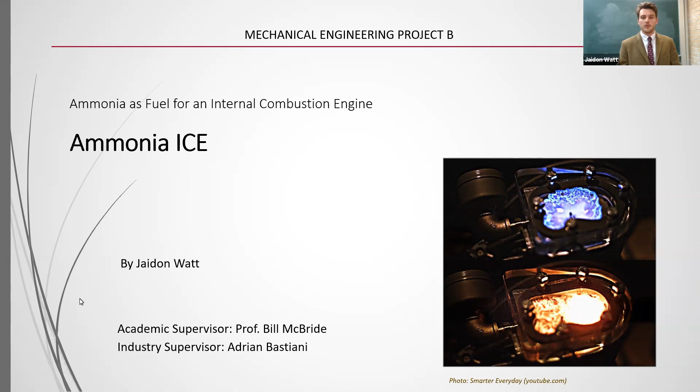Hi, my name is Jaidon Watt, and I would like to present my final year project in the study of ammonia as fuel for an internal combustion engine.

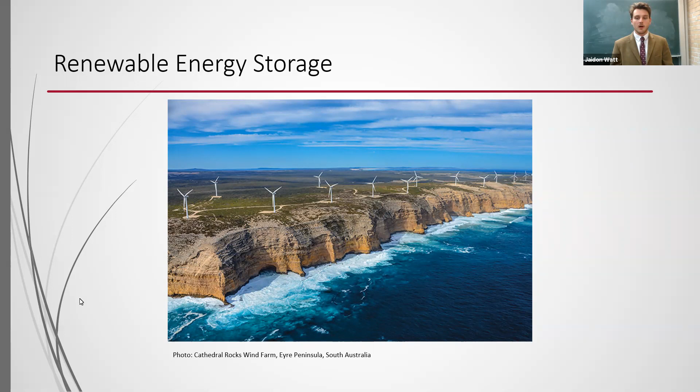So what's the alternative? Well, another form of chemical energy storage: fuel. A carbon-free fuel, that is. If the energy used to synthesize the fuel comes from renewable sources, the entire cycle can be made completely carbon-free. More specifically, using wind or solar to power a plant to make 1 part nitrogen from air and 3 parts hydrogen from water in the Haber-Bosch process to make ammonia.

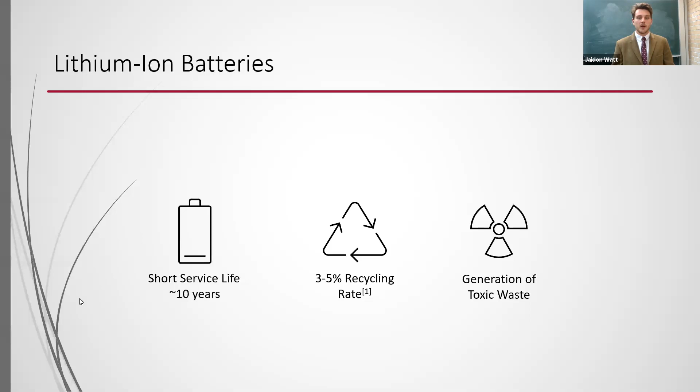A smelly, toxic gas, ammonia doesn't exactly scream clean energy future. But although it might not make you feel warm and fuzzy yet, allow me to point out why ammonia is starting to gain global interest.

First of all, as mentioned, it's carbon-free. The ammonia generation would store the clean energy and then later be able to fuel gas turbines, fuel cells, or reciprocating engines without direct CO2 emissions, in a process such as the one shown here.

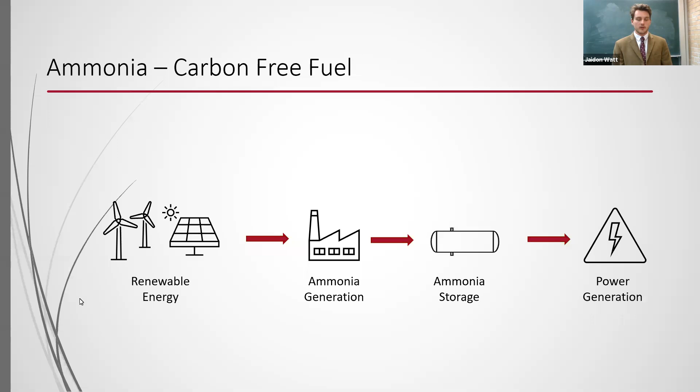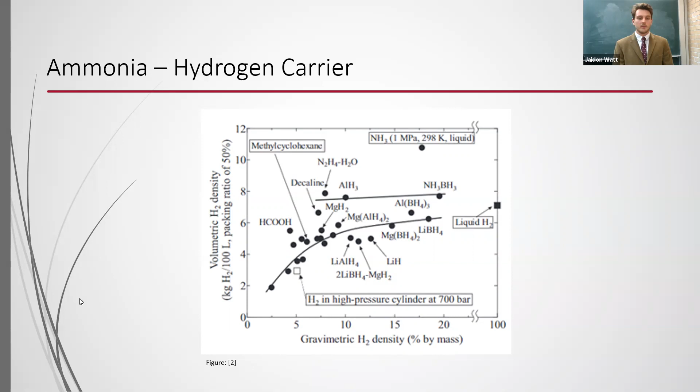Additionally, ammonia is a hydrogen energy carrier. It is more volumetrically hydrogen dense than liquid hydrogen, but much easier and safer to store and transport, being liquid at room temperature and relatively low pressure, with well-established infrastructure already in place. Which is why the CSIRO have developed a method to crack the transported ammonia into hydrogen for use, instead of storing hydrogen itself. David Harris from the CSIRO points out that ammonia is the key enabler for exporting renewables.

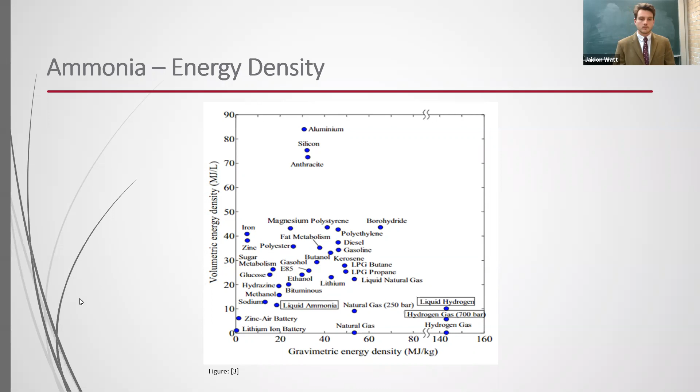The carbon-free and energy-dense nature of ammonia is the foundation of this project, whereby we are investigating the use of ammonia in an internal combustion engine for small-scale power generation, in the hope of providing off-the-grid power for rural homes. Although fuel cells may present the most efficient solution to using ammonia fuel, they are still expensive and would not be an affordable option for homeowners at this time.

In this final year project, the overall objective is to compare and optimize performance characteristics of a spark ignition engine using ammonia as fuel compared to conventional fuels, including all design and safety considerations in implementing the ammonia system.

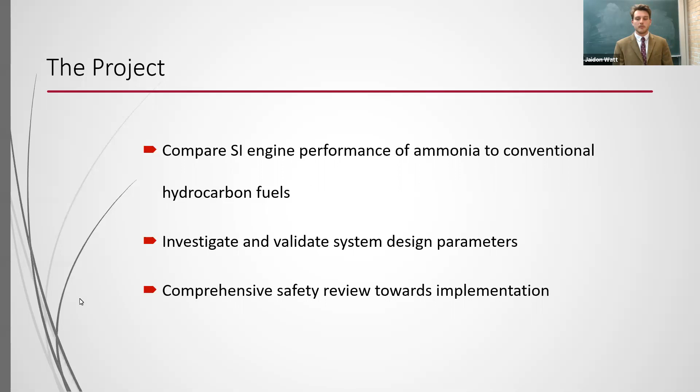In consideration of ammonia's limitations, I have a few listed here. So firstly, we have high auto ignition temperature, that's 2 to 3 times that of petrol or diesel. That is the temperature at which it auto combusts without a spark, which makes it difficult to use in a diesel engine, requiring impractical high compression ratios. This is, however, alleviated by its high flammability limits, allowing for more fuel to air in the combustion chamber.

We also have a high latent heat of vaporization - that is the energy required to phase change from a liquid to gas. We'll see that later, that's an important fact. And lastly, slow flame speed - it is 1/5 that of petrol. That is the velocity of the flame in the combustion chamber, which can result in engine knock or misfire.

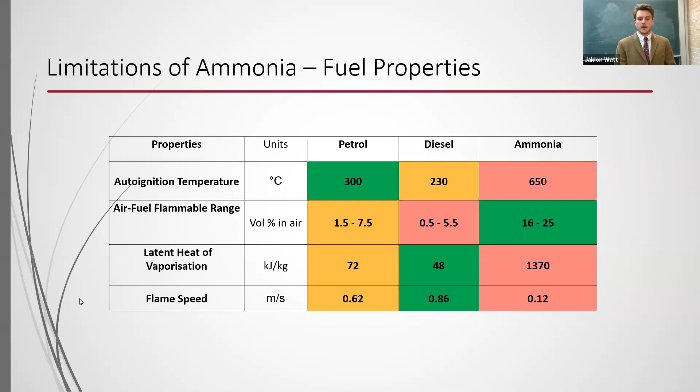Misfire is a risk of releasing unburned ammonia known as ammonia slip, which is hazardous to human health at fairly low concentrations. Finally, imperfect ammonia combustion trades one problematic pollutant, carbon, for another, nitrogen.

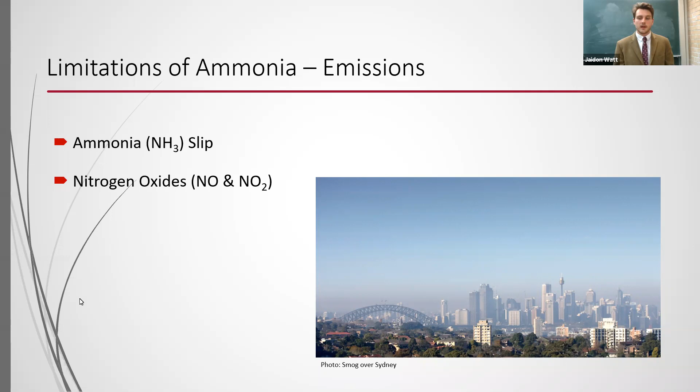Nitrogen oxides, or NOx, are responsible for ozone depletion, smog, and acid rain. It is the reason you have a catalytic converter on your car, but similarly, there are processing techniques to mitigate NOx on an ammonia engine to acceptable emissions.

To alleviate these problems, a combustion promoter is usually required. The ideal promoter is hydrogen, given that it produces no carbon, has the highest reported thermal efficiency, and would not require any additional storage, as part of the ammonia could be cracked to account for 5 to 15% of the fuel mix. However, we did not have access to this technology or the ability to store and combust hydrogen safely.

Therefore, the project considered the use of a hydrocarbon promoter. Given we are using a spark ignition engine, we investigated the use of petrol as a combustion promoter. The optimal mixture suggested in the literature is roughly 70% ammonia to 30% petrol.

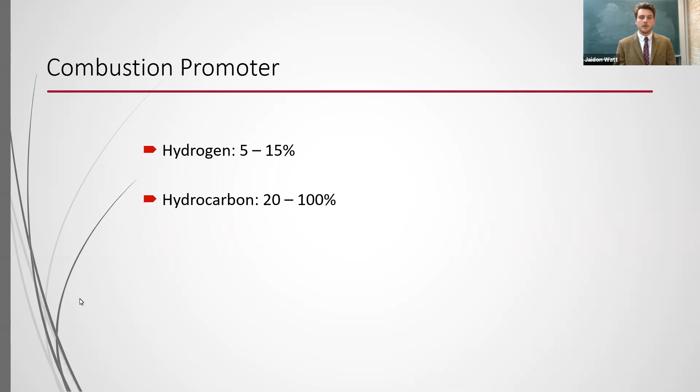The use of petrol is justified by a dramatic reduction in carbon emissions at low petrol mixtures, 75% reduction at around the optimal fuel mix. The linear relationship is shown here.

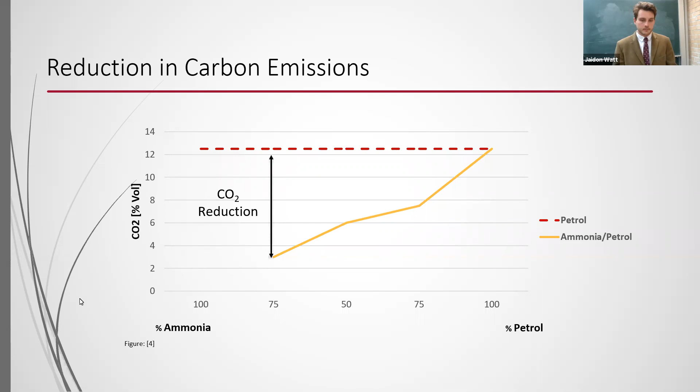The literature shows that use of ammonia also demonstrates a significant improvement in the engine's efficiency and performance than just petrol alone. This study, for example, achieved 32% brake thermal efficiency at 68% ammonia mix, dependent on performance characteristics such as compression ratio, equivalence ratio, timing, and inlet pressure and temperature.

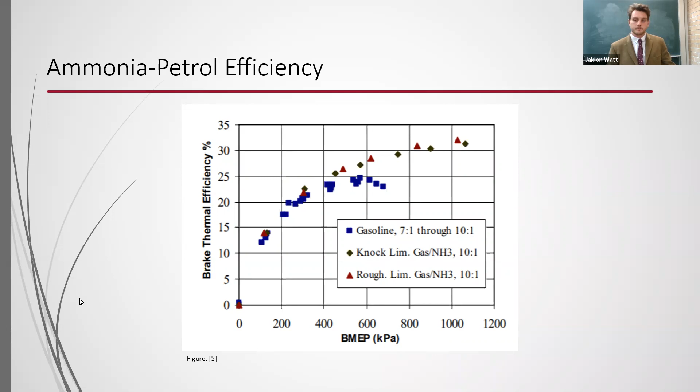The engine used for experimentation in our project is a 16 horsepower rated stationary engine, initially carbureted, coupled to one of the eddy current dynos in the EC building test cell.

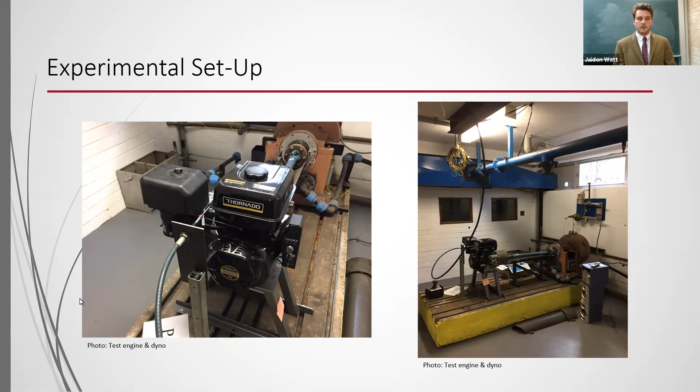After the design and fabrication of the exhaust incorporating a lambda oxygen sensor, we could perform baseline engine tests using petrol. The engine is controlled through the dyno controller and some installed software.

The transient response is controlled through the software, though this settling time was difficult to decrease beyond a certain point. This is the operating interface while performing testing, which I think is very cool.

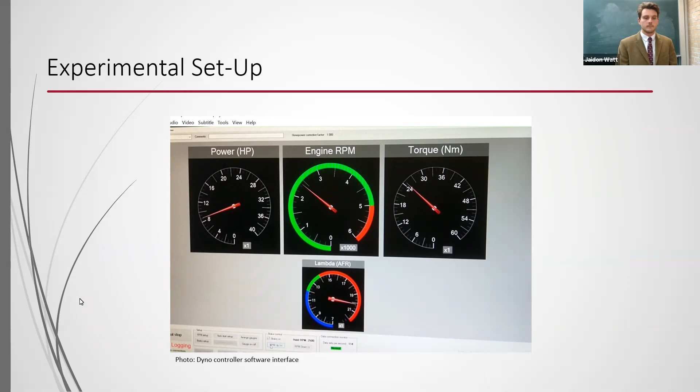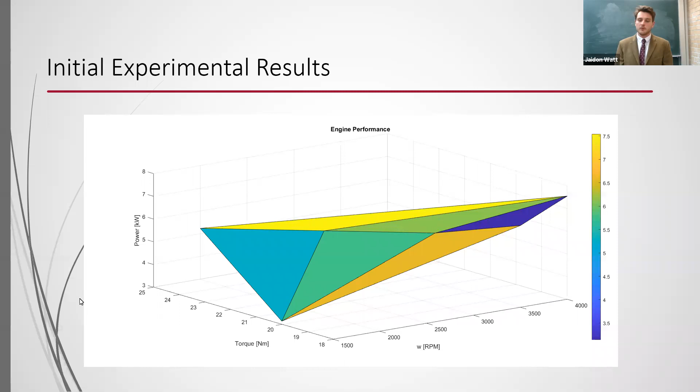The engine is designed to operate at a wide open throttle, that is around 3,600 RPM and beyond. As such, poor performance was observed in the low RPM range and even stalled below 1,500 RPM. The results also need to be repeated due to an error with the controller limiting speed beyond 3,500 RPM.

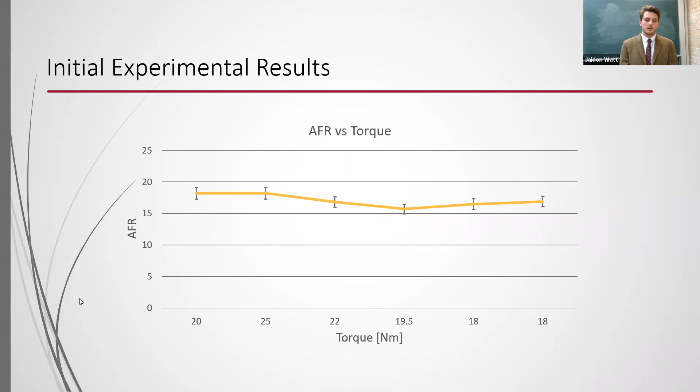Very high air-fuel ratios were also observed when the load of the dyno was applied, as you can see here. For context, the stoichiometric air-fuel ratio for petrol is 14.7, which is much lower than what we were achieving.

It will be interesting to observe ammonia exhaust gas temperature with lower air-fuel ratio, and if the temperature range will be suitable for selective catalytic reduction to control NOx. So this will be compared in future.

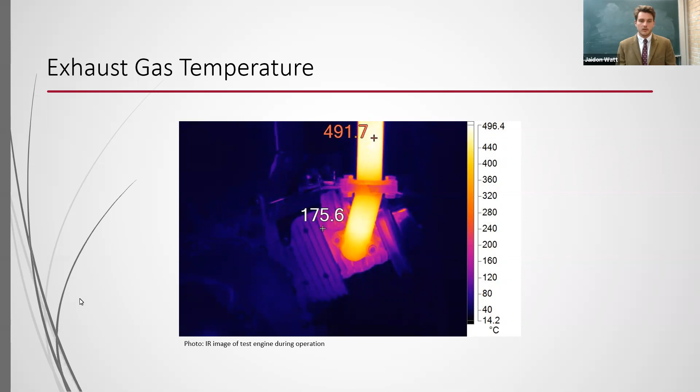To test the petrol ammonia fuel mixture required a dual fuel system design. This requires converting the existing carburetor to electronic fuel injection.

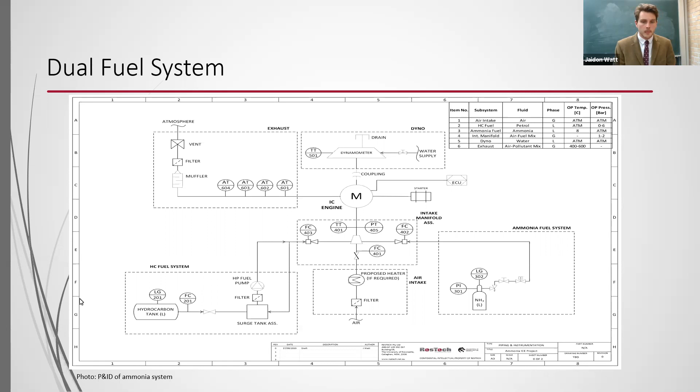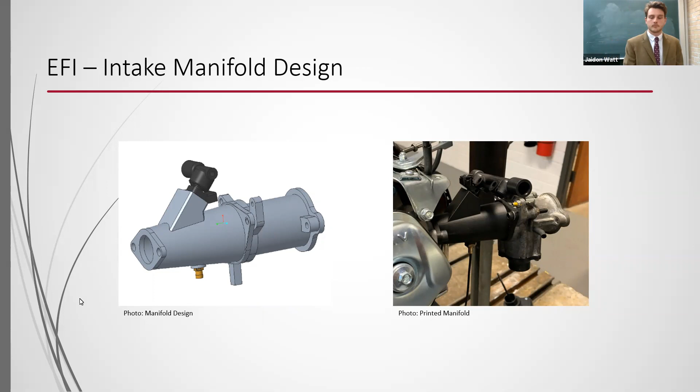The intake manifold was designed to incorporate the petrol and ammonia injectors, allowing the injected fuel to be pushed through by the airflow through the butterfly on the throttle body. The manifold was designed in Creo and printed in Onyx high temperature nylon composite. It's this black part connected between the engine and throttle body shown here. There were several design questions around implementing this system.

For example, should we inject liquid or gaseous ammonia? What flow rate is required? What size tank do we need? There is no commercially available injector for gaseous fuel.

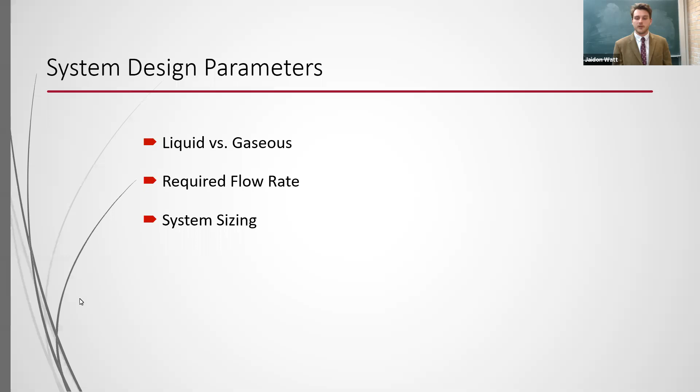So an LPG injector was purchased on the intention of injecting liquid ammonia. The problem with injecting liquid ammonia is the previously mentioned latent heat of vaporization, consuming a large amount of energy and cooling the in-cylinder air temperature, which is further exacerbated by requiring more ammonia fuel to provide the same energy density as petrol. Furthermore, after consulting with BOC gas, the standard method of drawing ammonia from the cylinder is allowing part of it to vaporize in top of the cylinder and drawing the gas.

Based on required flow rate calculations seen here, at the peak of around 80%, we would need approximately 92 grams per minute of ammonia. Ammonia is the blue line seen here.

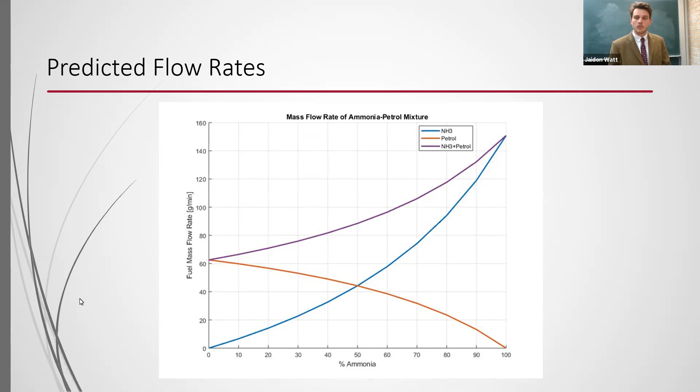So the gaseous flow rate of the LPG injector was quickly tested. This was done with compressed air, first by inflating a balloon and measuring the displacement of water over time, and then more accurately using a bubble flow meter. Unfortunately, I applied too much current to the injector on this final test and burned it out.

Due to the large difference in density from gas to liquid, liquid is much more volumetrically efficient and consequently requires a much lower flow rate. The test demonstrated that the gaseous flow rate was 1/20th the required flow rate for the engine.

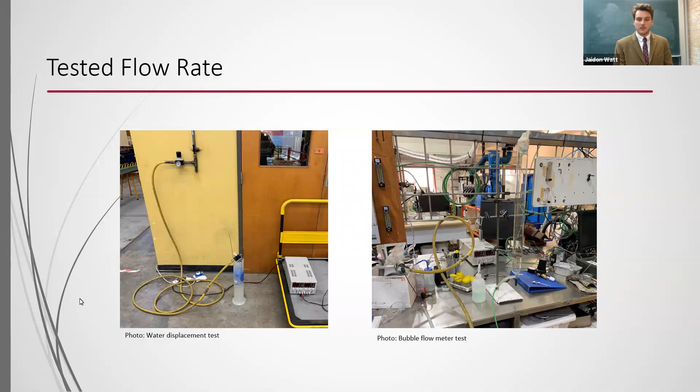Therefore, we were back to liquid, although it is not standard practice to draw liquid. This requires maintaining pressure all the way to the injector. Initially, we suggested to simply turn the bottle upside down. However, this could not be recommended by the supplier.

So we needed a dual port valve and an auxiliary cylinder of inert gas to drive the flow, as seen here. It works by the same principle as a juice box, and the inert gas works as a piston to force the liquid through the line.

Given we are now injecting liquid, the air or fuel stream may be heated prior to the injection to counteract the vaporization cooling problem.

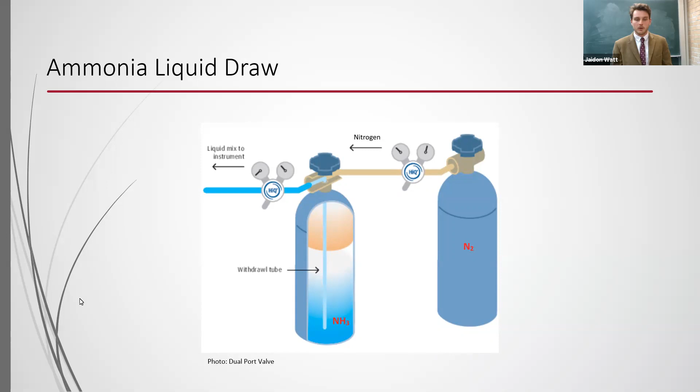An integral part of the viability of this project was safety. To be able to safely use ammonia in testing, it requires approval from the University Chemical Radiation Technical Committee. This involved an extensive risk assessment, safe operating procedure, and Australian standard compliance.

Given ammonia's toxicity, the main concern is a leak. This required implementing safety features such as inclusion of a solenoid shut-off valve, exhaust fan operation at all times, gas monitoring, and system isolation.

Ammonia is toxic above 25 parts per million over an 8-hour period or 35 parts per million over a 15-minute period. As a gas, it's lighter than air and will rise to the ceiling or into the atmosphere, though in large quantities can form a ground-hugging vapor cloud.

Liquid leak behavior is more complex, however. As it flashes to vapor, some ammonia remains a liquid. This is known as two-phase flashing.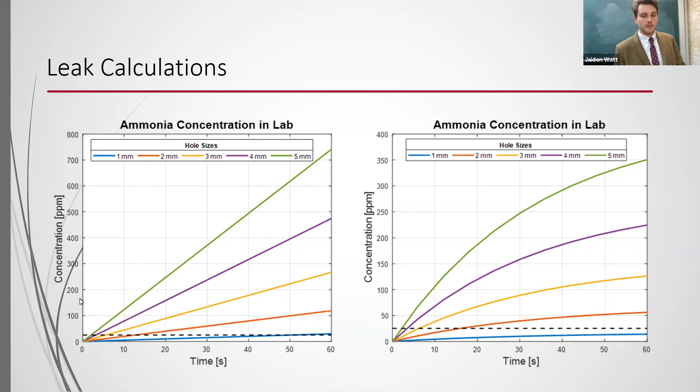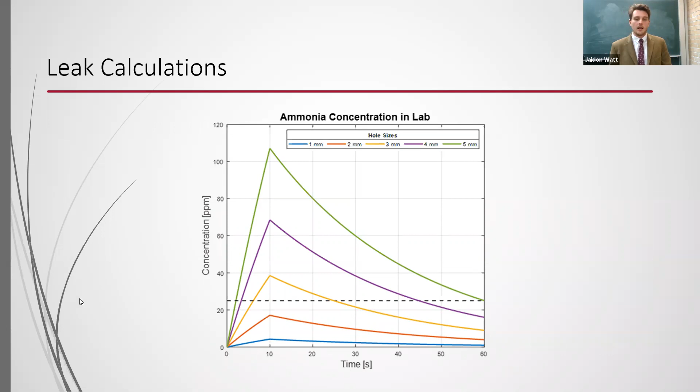Finally, the current state of the project. The proposed cylinder setup along with the pipework came in above our budget, meaning we were not able to procure the ammonia for the project at this time. So from this point onwards, I'll be further developing the system design and honing the baseline petrol results in the hope that the project will continue with another student next year.

Okay, so to conclude, future work still required includes improving baseline results, EFI wiring and tuning. I may also improve the ammonia theoretical calculations, though I won't have time to perform proper simulations.

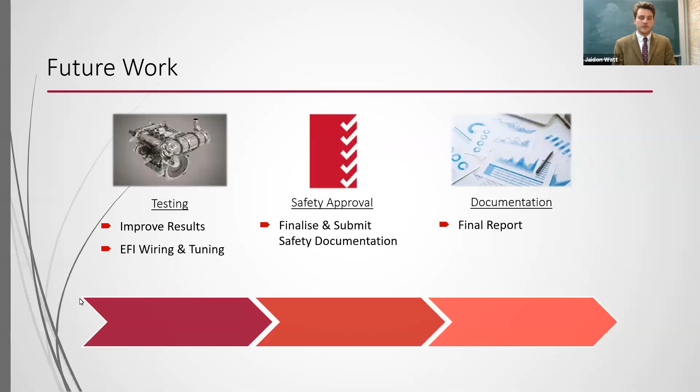So the safety documentation is submitted for approval to committee. And finally, a lot of report writing to submit my final report.